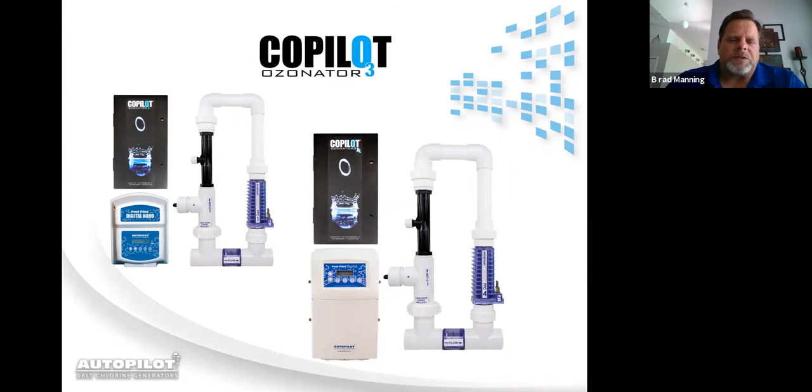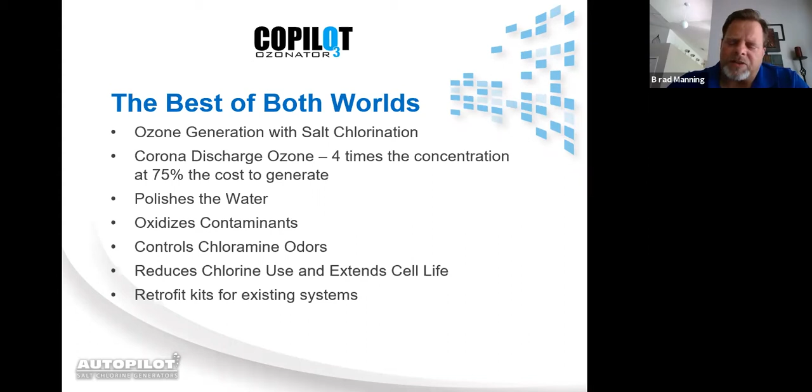This is our CoPilot, partnered with our salt systems. It's the best of both worlds. You got ozone generation with salt. Corona discharge is 4 times the concentration of ozone that UV is. It polishes the water, oxidizes contaminants, controls chloramine odors, reduces chlorine use, and extends cell life. It can retrofit into any of the systems that are AutoPilots that you have in existence.

The Pool Pilot chlorine generator works with the ozonator to give you the best of both worlds. It kills 99% of all the microorganisms that can get into your pool. Ozone destroys everything - cryptosporidium, E. coli, Ebola, any microorganisms. It's 200 times the oxidizer that chlorine is. It's environmentally friendly because it only has about a 20-second shelf life. So by the time it makes it back to your pool, basically the bubbles coming out of your return are nothing but pure oxygen.

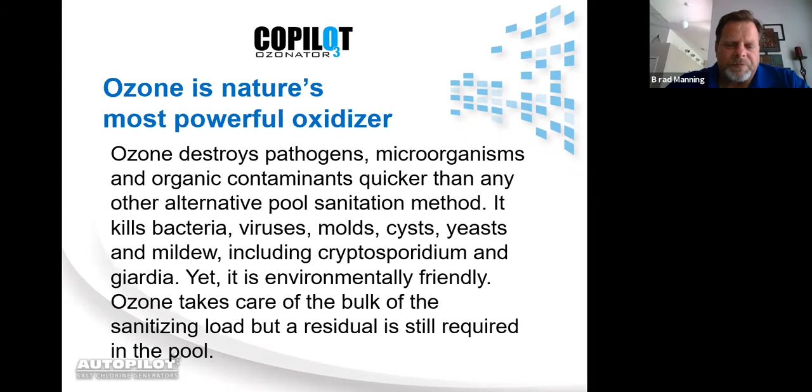Ozone reduces the need for chlorine by 60 to 90%. This allows you to keep your pool at a lower chlorine residual and still keep the pool looking good because you've got the ozone doing all the heavy lifting, taking care of all the contaminants.

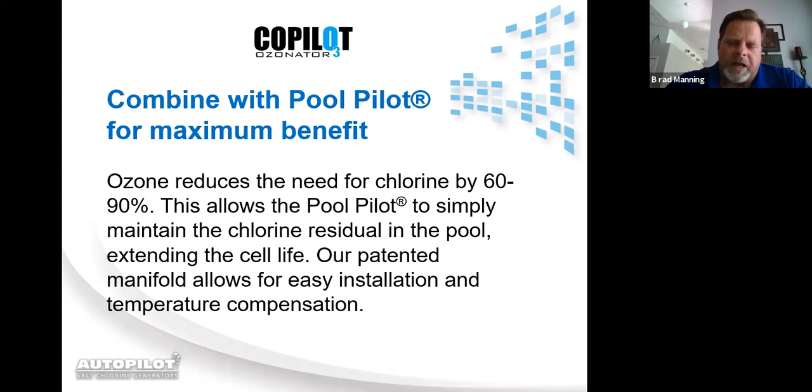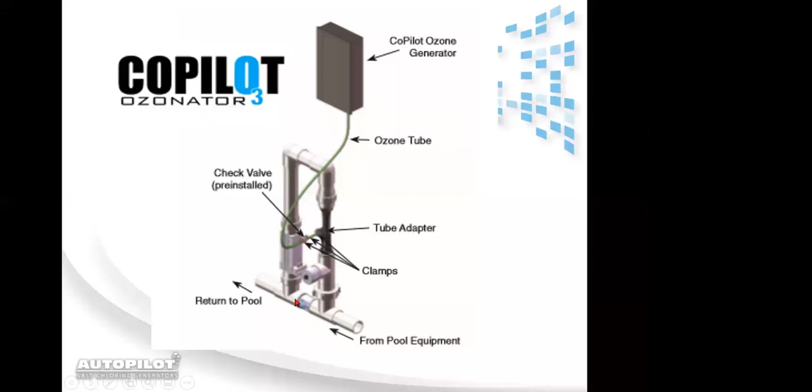You have your power supply that goes on the wall, and then you have our patented manifold with the Venturi in it. The ozone tube has a check valve in it to prevent water from making it back up to the power supply. You've got a 5-pound check valve in our bottom manifold down here. So if you're doing a retrofit, you want to be sure that you remove the old bottom manifold and plumb the new manifold in, because an old manifold that doesn't have a CoPilot has a 3-pound check valve, where this is a 5-pound check valve.

We want to force more water up through the Venturi. You'll also notice that the tri-sensor has been moved down here; on a normal upper manifold, the tri-sensor is located at the top. But as I said, ozone's 200 times the oxidizer that chlorine is, so if we left the tri-sensor up here, it'd eat the flow paddle away.

The manifold should be installed downstream of all pool equipment and on the pool return line only. If your water can exceed 70 gallons per minute, we need you to install a secondary bypass. You want to use a 5-pound check valve here. Preferably - I mean, you can use ball valves, but ball valves have handles and homeowners like to turn handles, so we highly recommend using a 5-pound check valve here. That'll take anything that's 5 pounds or less and divert it up to the upper manifold.

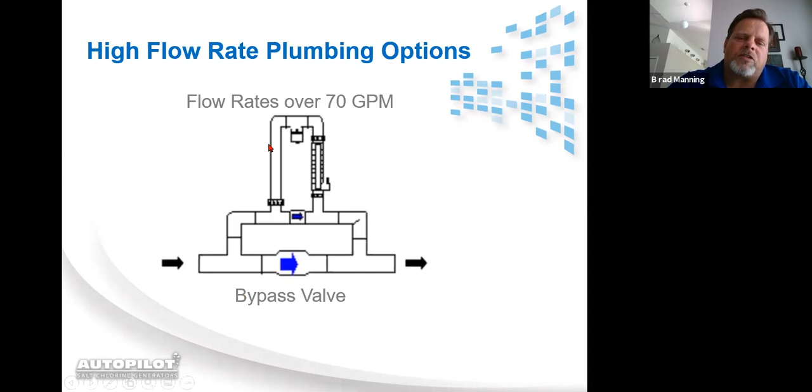Tips on installation: it's okay to use the power from the AutoPilot provided it's tied in to the pool pump time clock. Or if you've bought a Dig 220 or 75003 that is running your pool pump, you can tie the CoPilot in to the load side of the AutoPilot. So when the pump turns on, the CoPilot turns on. The unit is to only be on when the pump is running. If you put it on the line side or have it powered all the time, it's going to generate ozone whenever it's got power.

So the pump has to be on to create the venturi to evacuate the ozone from the system. The system needs to be installed 12 inches above the max water line.

You do not want to install this below grade. If you install it below grade, the pool water pressure, if that check valve fails, you're going to wind up with a flooded power supply.

You also probably want to install a check valve into the pump return line before the injector point or our manifold. That way, when the pump shuts off, the ozonator is still going to allow air into the system. So to keep it from having a hard time to prime, you want a check valve there to keep the water inside the pump.

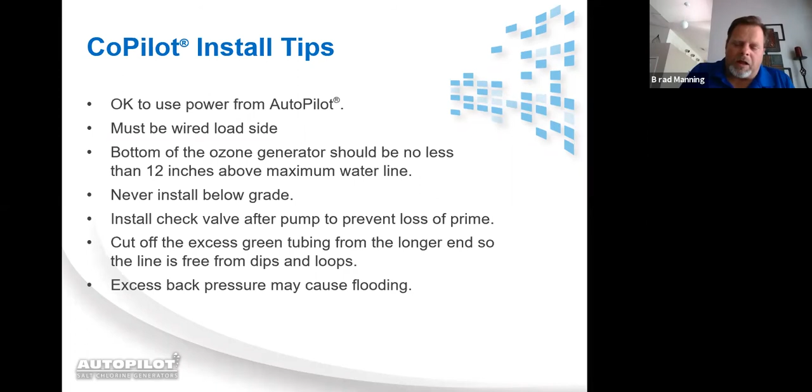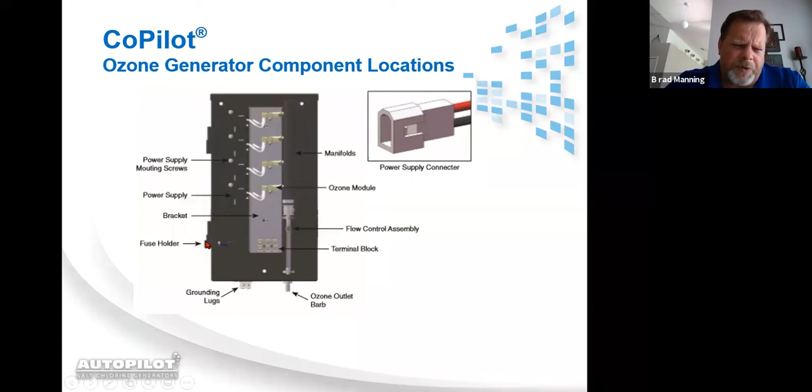Each corona discharge cell has its own indicator light. You always want to disconnect the power, turn the power off whenever working inside of here. Touch the wrong thing inside of here with power on it, you're gonna get lit up.

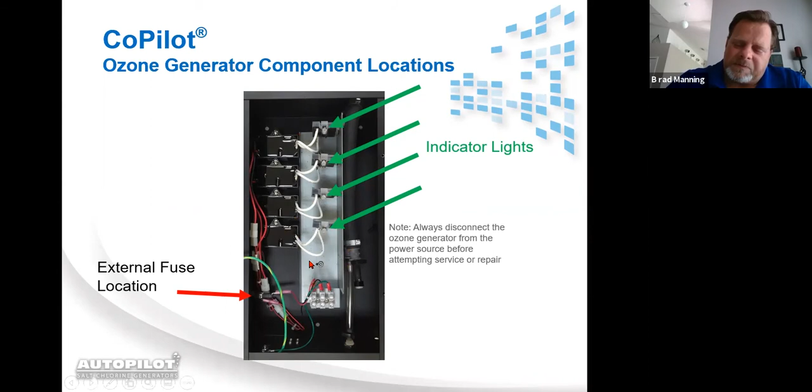On the troubleshooting, it's pretty simple. No airflow, you're gonna check the venturi to see if it's blocked. You'd simply undo the hose, stick your finger over the injection point, and with the pump on, see if you feel any suction there. If you don't feel any suction where the hose is attached to the manifold, then you've got a blocked or clogged venturi.

I found that a paper clip, if you keep a paper clip on the truck, you can use that paper clip to stick down inside the injector port and clear up any blockage that may be there.

You want to make sure your check valve is functioning properly. The check valves do have an arrow on them, so as to indicate the direction of the flow of air. Sometimes they could be put in backwards. That will definitely prevent air from getting into the manifold.

Like I said, any excess line, you don't want that. Any kinks in the hose, all of that will prevent airflow. You want to check your tubing to make sure it's not clogged as well.

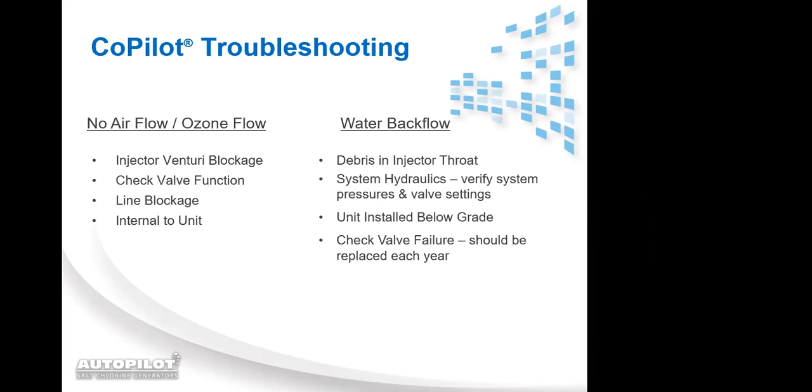If you got backflow, typically that backflow is going to be check valve installed backwards, or debris in the injector throat, which can prevent a venturi and actually cause the pressure of the water to go back to the system. The check valve should stop that.

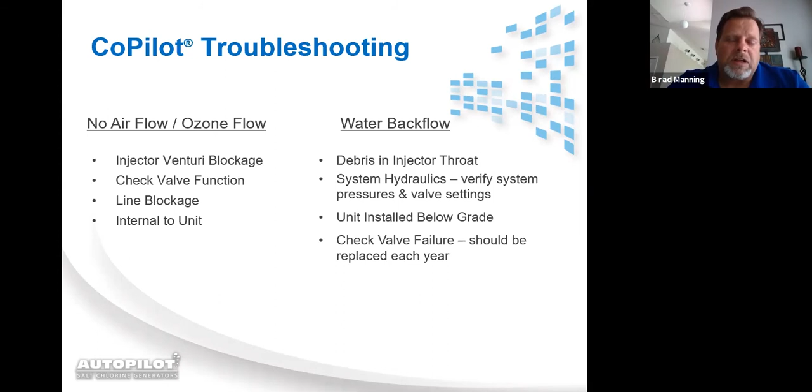Unit installed below grade will definitely create back pressure. And then once again, like I said, if you have anything downstream of it, such as in-floor cleaning systems, if they get stuck between zones or whatever else, that can create back pressure.

All right, troubleshooting the power supply. Once again, like I said, it's pretty simple. Each individual corona discharge cell has its own indicator light. So if all the ozone lights are gone or not lit up, you need to check the incoming power.

Go to your breaker box, make sure your breaker's on, get your multimeter out, check the incoming power into the unit, make sure the unit is receiving proper power.

Now, we'll tell you with these systems, there is no conversion for them. It doesn't matter what incoming voltage you have, 220 or 110, they both hook up to the same terminal strip. So you need to check your incoming voltage and make sure you have it.

If you have incoming voltage, then you need to go to your fuse holder, pull your fuse out and do a continuity check on it and make sure you have continuity. If you have continuity, then it's time to start replacing corona discharge cells.

All right. If your ozone indicator lights don't light up, just got a couple of them - if you've got a 4-cell system and one or two of them are out, then more than likely it's just the Corona discharge cells. You need to replace them, and you can replace them with the APG ozone cells. The part number is APK0052.

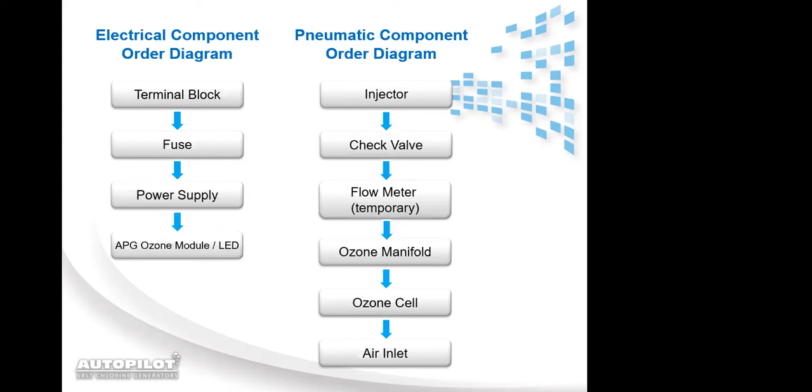All right, this is just our flow chart for diagnostics. Incoming power terminal block, from the terminal block to the fuse, from the fuse to the power supply to the ozone module. With the airflow, you've got from the injector to the check valve, the flow meter that I was just telling you about that's temporarily installed when you're first setting the unit up, and then onto the ozone manifold and the ozone cell and then in the air inlet.

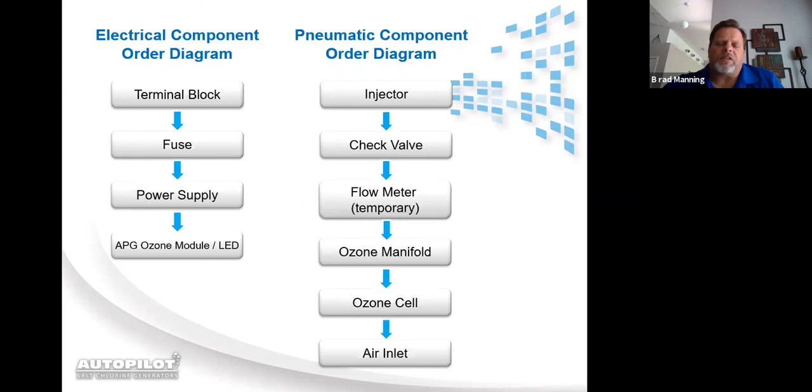All of these parts are listed on our parts breakdown catalog on the AutoPilot website. So you can go to the AutoPilot.com website, click on resources, and once you click on resources, if you scroll down, you'll see that it lists the AutoPilot parts breakdown catalog. If you have a smartphone, you can download it to your smartphone on a Books app, or you can download it to your computer in a PDF file.

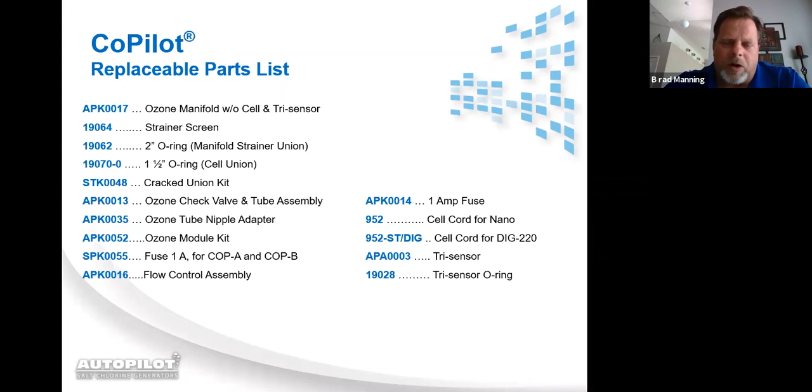The parts breakdown catalog is excellent. There's pictures - a picture's worth 1,000 words when it comes to parts. That pretty much concludes our presentation on the ozone.